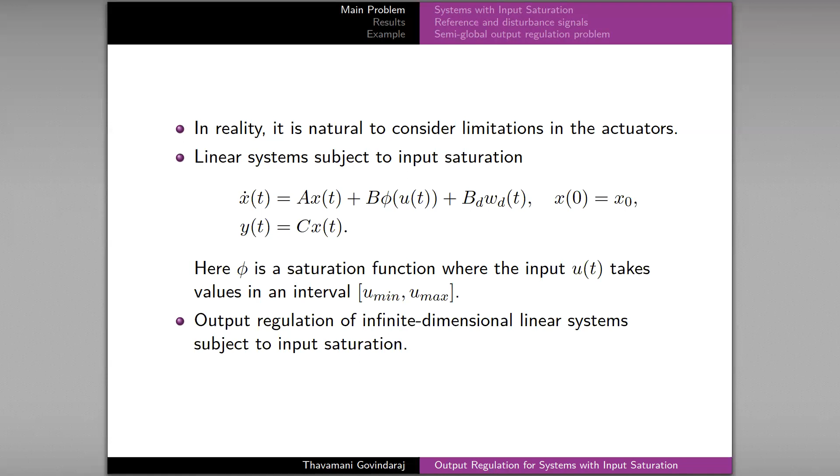In this work, we focus on output regulation of infinite dimensional linear systems subject to input saturation. In particular, we consider a class of abstract linear systems of the form given by these equations on a real Hilbert space X. Here x of t is the state variable, u of t is the input, y of t is the output, w of t is an external disturbance, and phi is a saturation function. The saturation function phi is defined as follows.

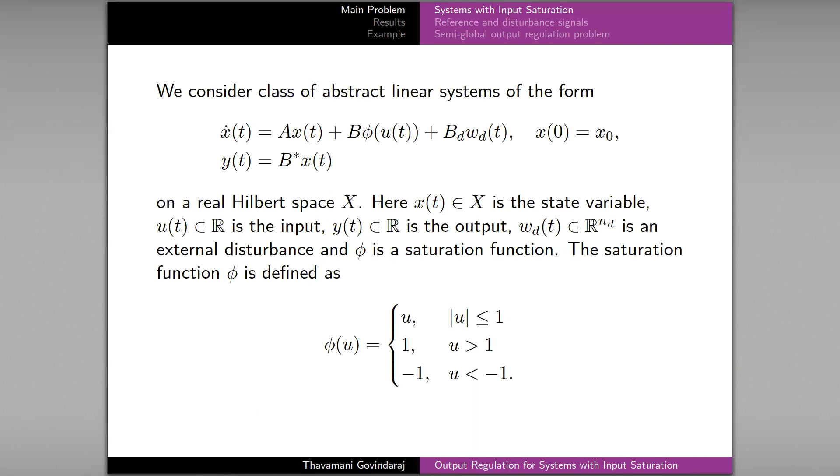The considered class of systems arises in the study of systems with collocated actuators and sensors. Our goal is to find a linear feedback control law, u of t, such that the output of the system tracks a given reference signal asymptotically. We extend the output regulation theory in the work by Saberi and their co-authors for finite dimensional systems subject to input saturation to the considered class of systems.

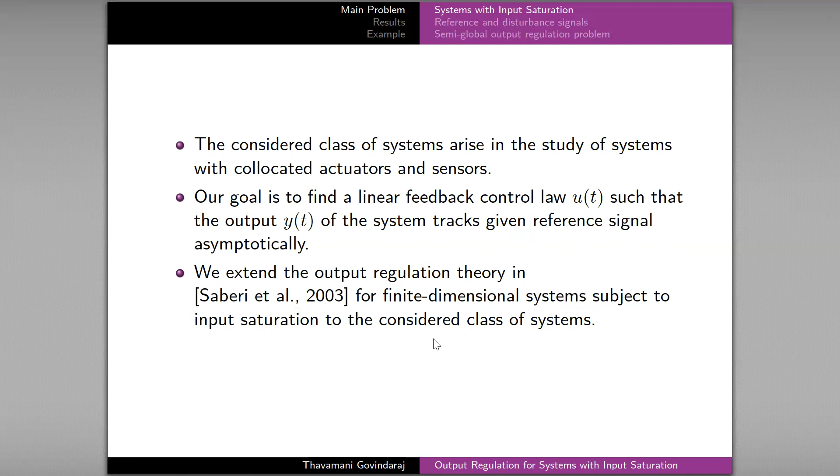The reference signals to be tracked and the disturbance signals to be rejected are assumed to be generated by an exosystem of the form given by these equations on a finite dimensional space W. Here, S, F, and E are matrices of suitable sizes.

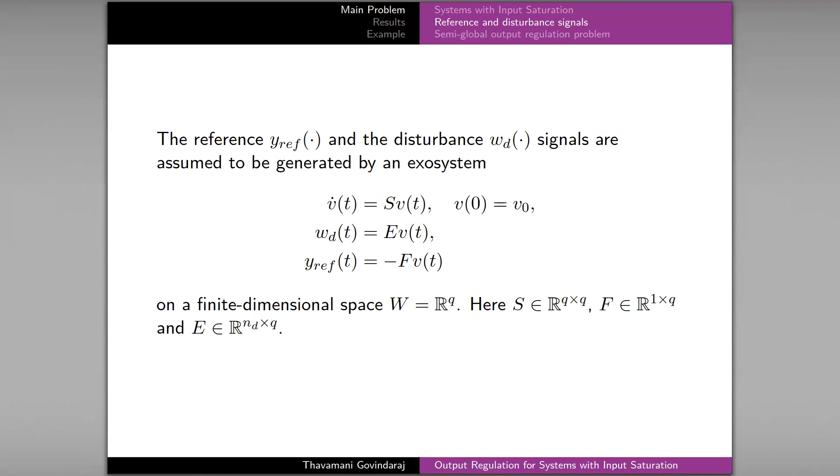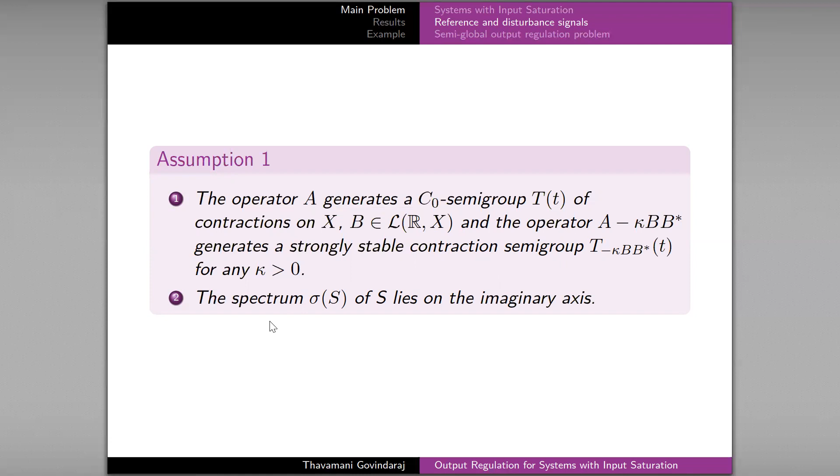We make the following assumptions. The operator A generates a C0 semigroup of contractions on X. B is a bounded linear operator from the input space to the state space X, and the operator A minus kappa B B star generates a strongly stable contraction semigroup for any kappa greater than 0. The spectrum of S lies on the imaginary axis.

From the output regulation theory for finite dimensional systems subject to input saturation, we know that the output regulation problem is not solvable for all initial conditions of the exosystem, meaning that there exists at least one initial condition of the exosystem for which the tracking is not achieved. In this work, we focus on the semi-global output regulation problem where the initial conditions of the exosystem are restricted to a compact set. So the semi-global output regulation problem considered in this work is defined as follows.

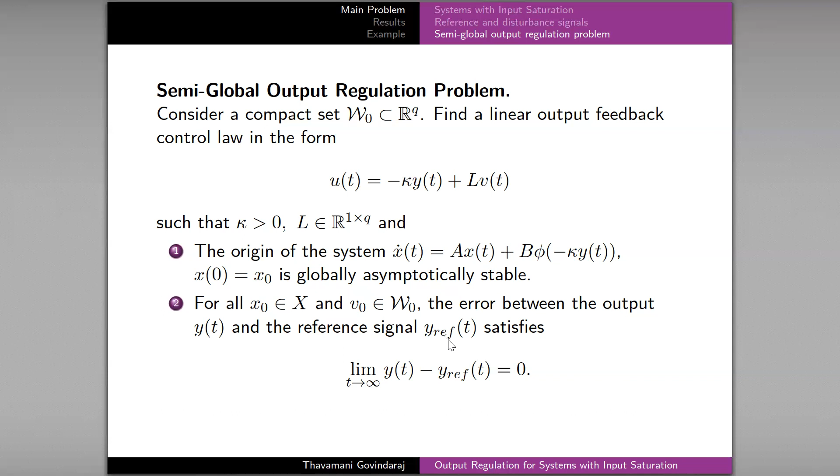Consider a compact set W0. Our goal is to find a linear output feedback control law in the form given by these equations, such that kappa is greater than 0, L is a vector of size 1 by Q, and the origin of the system given by these equations is globally asymptotically stable, and for all initial conditions of the system and initial conditions of the exosystem in the compact set W0, the error between the output y of t and the reference signal decays to 0 asymptotically.

Next, let us discuss our results, which give solvability conditions and the control law for the semi-global output regulation problem. Our main result is an infinite dimensional generalization of the work by Saberi et al. Our approach for showing the asymptotic convergence of the regulation error is motivated by the techniques in Curtain and Zwart.

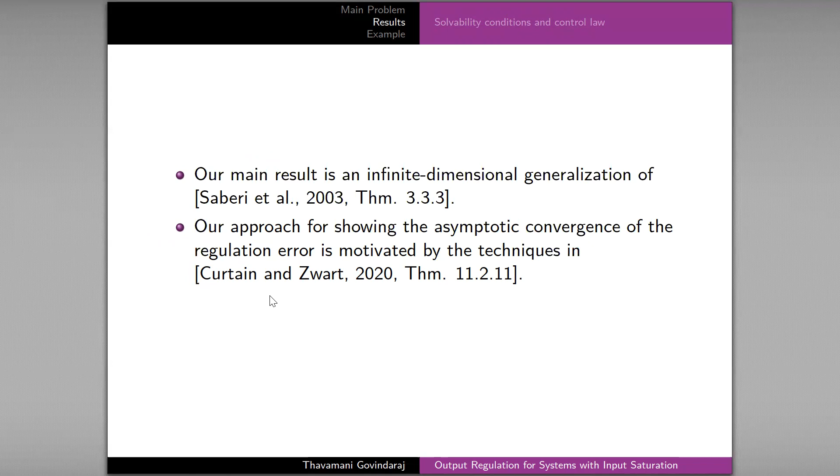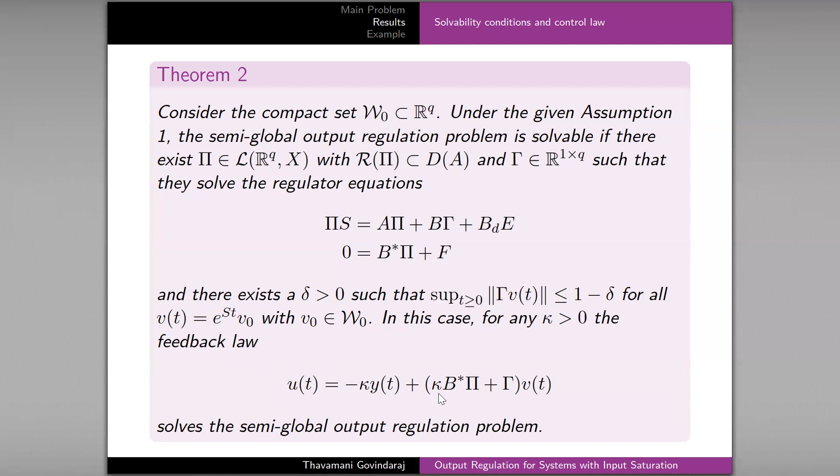This is our main theorem. Consider the compact set W0, which is a subset of the finite dimensional space R to the power Q. Under the given assumptions, the semi-global output regulation problem is solvable if there exist Pi and Gamma given as here, such that they solve the regulator equations given by these equations, and there exists delta greater than 0 such that the supremum norm of Gamma v of t is less than or equal to 1 minus delta for all v of t with v0 in W0. In this case, for any kappa greater than 0, the feedback law given by this equation solves the semi-global output regulation problem.

Here we give an outline of the proof. The first is we have to prove the origin of the system when disconnected from the exosystem is globally and asymptotically stable. So this can be done by using the strong stabilizability of the system by negative output feedback and uniform Lipschitz continuity of the saturation function and a result from Curtain and Zwart.

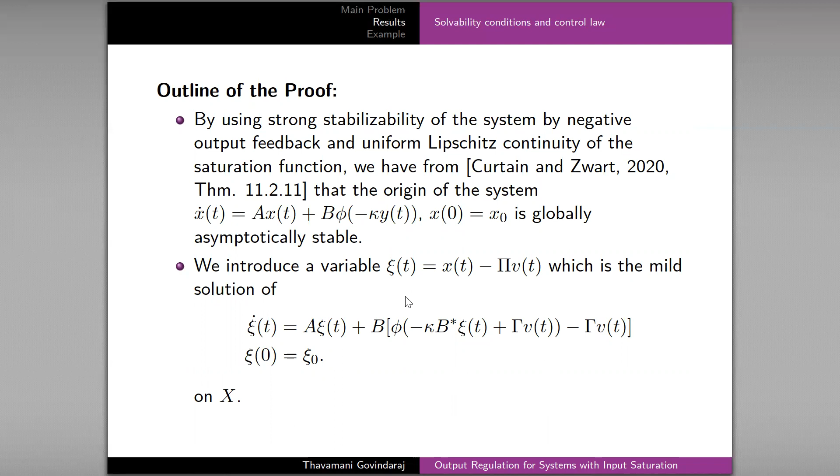Next, we have to show the regulation error decays to 0 asymptotically. For that, we introduce a variable xi of t in terms of the states x of t and v of t, which is the mild solution of the system given by these equations. Now, by using the assumptions of the theorem, we can show that the mild solution xi of t decays to 0 asymptotically. So this will imply that the regulation error can be written in this form.

This term equals 0 from the regulator equations. And we have already shown that xi of t converges to 0 asymptotically. So therefore, the whole term y of t minus y ref of t converges to 0 asymptotically.

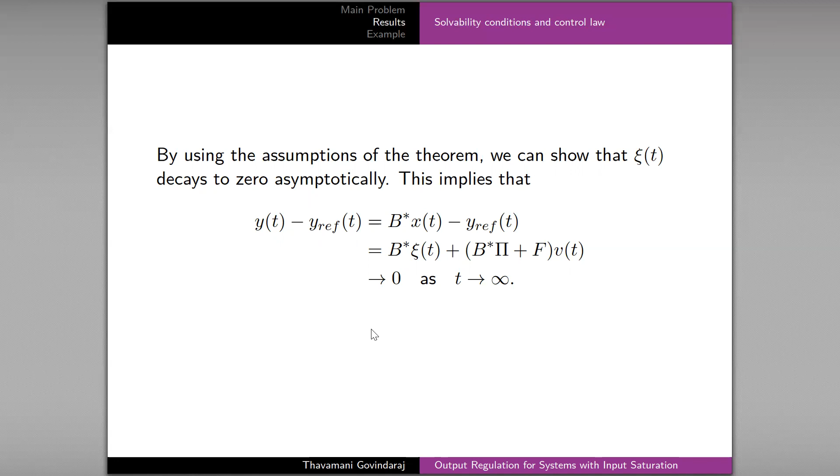Here we present a lemma which gives solvability conditions for the regulator equations. Let A minus kappa BB star generate a strongly stable contraction semigroup for any kappa greater than 0. Assume that the spectrum of S lies on the imaginary axis and S has no non-trivial Jordan blocks. Then the regulator equations are solvable if and only if no eigenvalue of S coincides with a transmission zero of

the system (A, B, B star). In this case, Pi and Gamma are given by these expressions, where i omega k and phi k are the eigenvalues and the corresponding orthonormal eigenvectors of S respectively, and G is the transfer function of the system (A, B, B star).

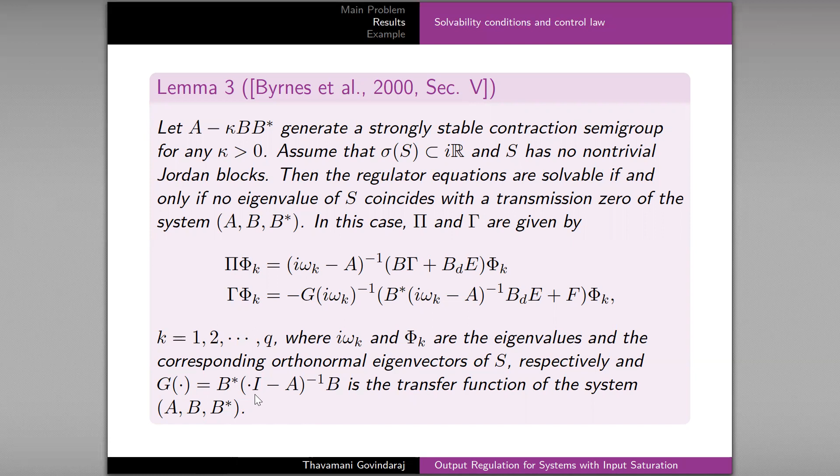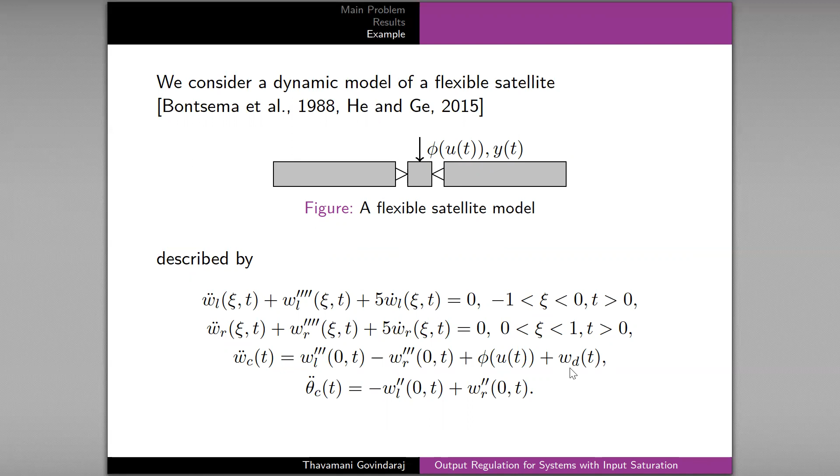Next, I will present an example to illustrate our results. We consider a dynamic model of a flexible satellite composed of two symmetrical flexible solar panels and a central rigid body. The equations of motion of this satellite model are described by these equations. Here u of t, y of t are the input and the output on the central rigid body. We also consider a disturbance on the central rigid body.

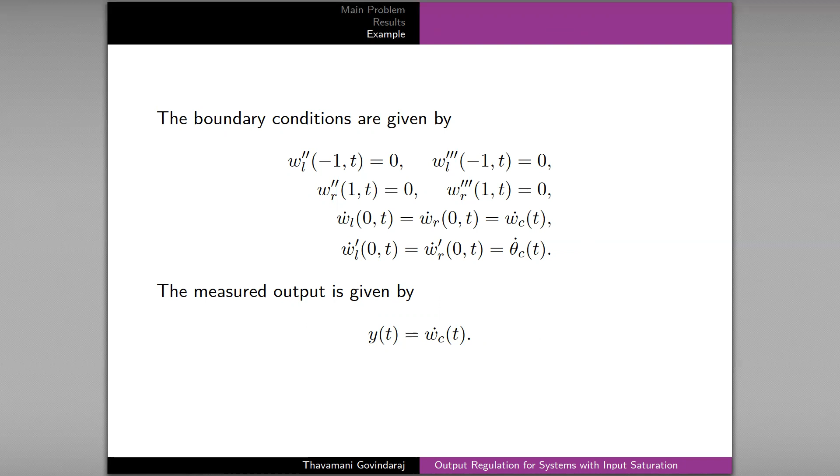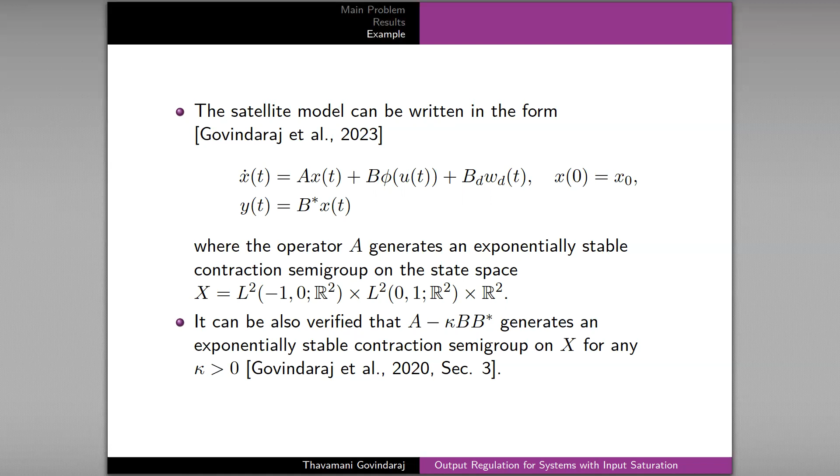The boundary conditions corresponding to the free ends of the beam and the coupling conditions between the solar panels and the central rigid body are given by these equations. The measured output is given by this. The satellite model can be written in the form, where the operator A generates an exponentially stable contraction semigroup on the Hilbert space X. It can also be verified that A minus kappa BB star generates an exponentially stable contraction semigroup on X for any kappa greater than 0.

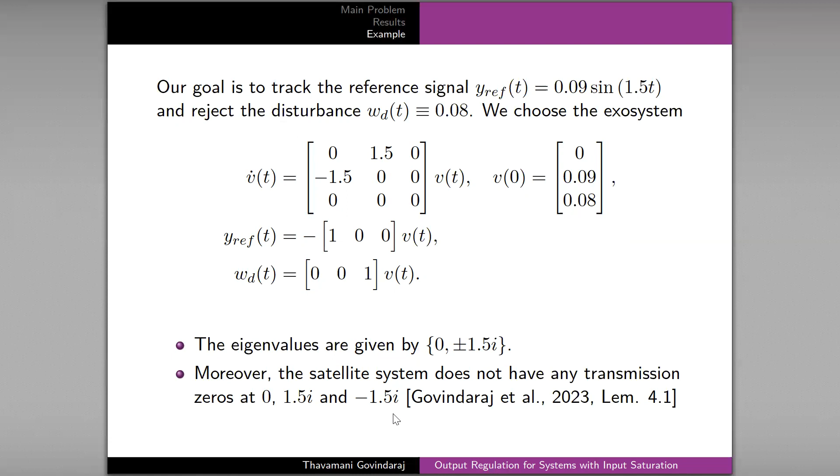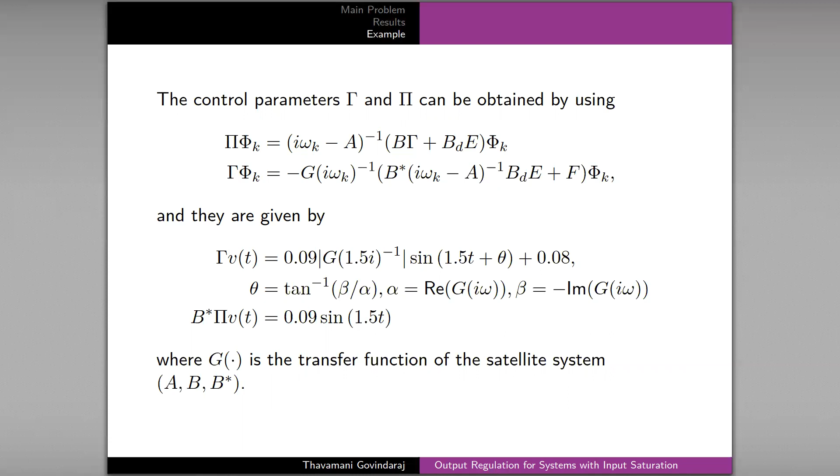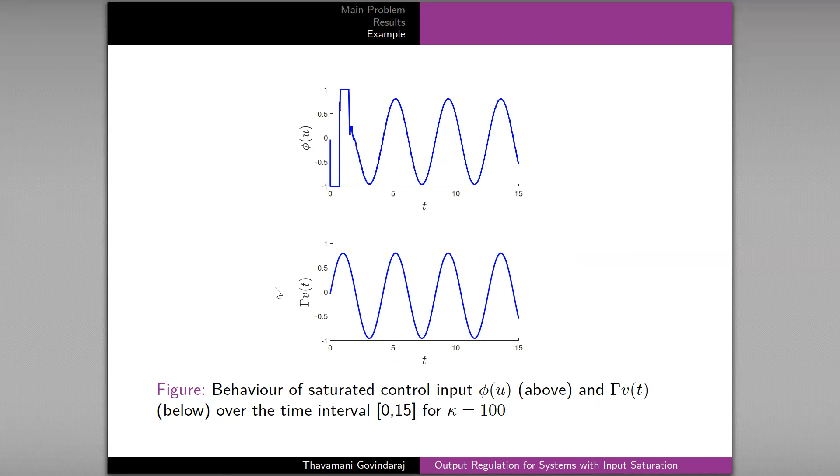We have run some simulations with kappa equal to 100. Here we can see the behavior of the saturation function and also Gamma times v of t. We can see this is below the saturation level for all t greater than 0. And also output tracking is achieved using this control input asymptotically.

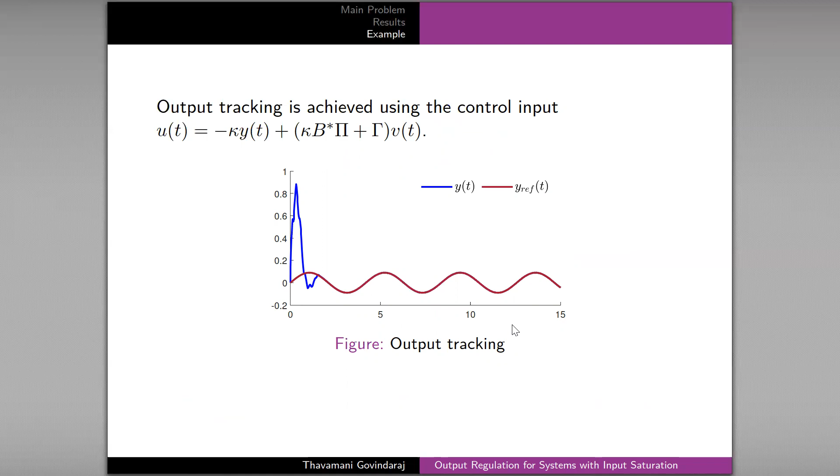It's time to conclude our talk. We considered a class of strongly stabilizable infinite dimensional linear systems with collocated actuators and sensors subject to input saturation. We proposed a linear output feedback control law that solves the semi-global output regulation problem. The results are illustrated with an example of a flexible satellite model subject to input saturation.